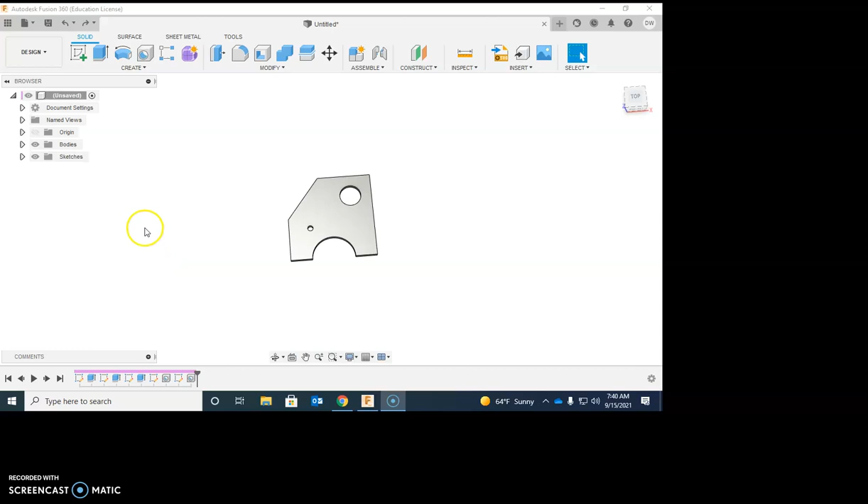Okay, so now that your block is created, we're going to do our CAM of this block, which is computer aided manufacturing. So you're going to go up here to design, where it says design up here in the top corner, and you're going to go down to manufacture. All right, brings you up a whole new toolbar here at the top.

We're going to be looking on this part, obviously, at the 2D manufacturing. So we're going to click on this, and there's all of these different options on 2D. We are going to do basically 3 that we use often. For a small hole that we have on the sheet, we're going to use a bore. We see here when we hover over the bore, you can see down below there, it shows some of those small holes there on that front face of that object. So this is what a bore is for.

Next one that we're going to use is for larger holes. We're going to use a pocket. What a pocket does is a pocket will clear out, as you see by the paths there, all the material entirely for that. So there's no pieces left there in the center of the object when you cut the hole. And you'll see the difference between that when I mention here about a contour.

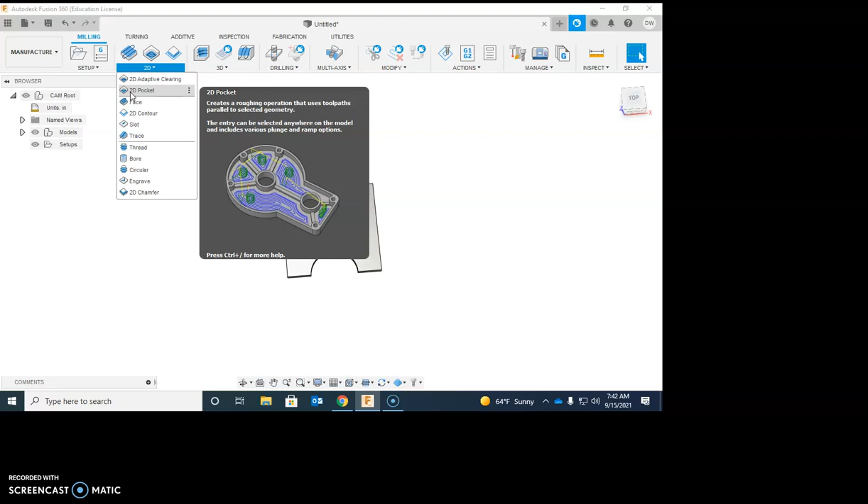So our last thing we're going to do is going to be for your outside path around the object, or for large holes, we're going to use a contour. So what a contour does, it just does one path all the way around the outside of the object, or as you see here, on the small holes all the way around the outside of the small hole. The problem is, when you do that larger hole and do that one path around the outside, it leaves you with that little disc in the center.

On plastic, that little disc in the center sometimes isn't bad, but it can still get jammed in there and it can snap off your cutter. Your cutters are very sharp, they're very hard, but with that they're also very brittle. So if that little piece gets jammed in there, it'll snap off your router bit, and for a 1/8 inch router bit, there goes about $30 to $40. So instead of that, we do the pocket, which removes all that material.

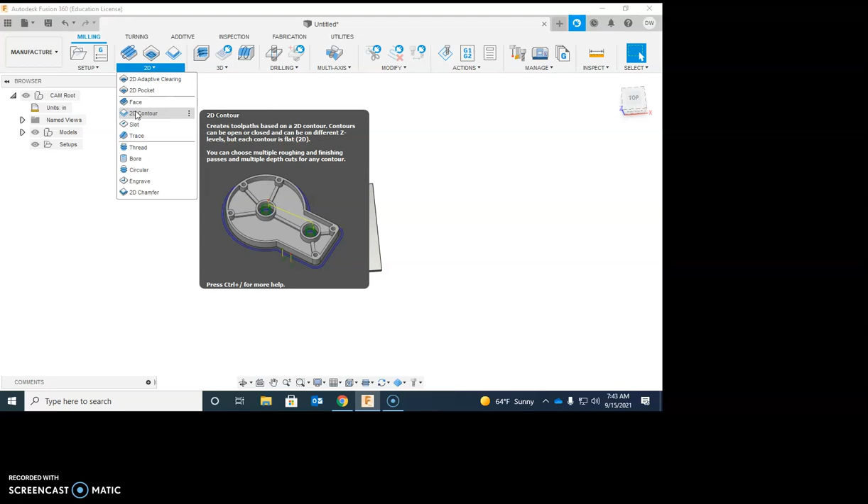If you're doing larger things, say a 2x2 inch hole in the middle of something, then we can do a contour, but we would want to fasten down that piece in the middle so it doesn't come loose. You could possibly put a screw in the center of that piece and screw it down to the table so it doesn't come loose. But you can't just let it lay in there loose. You could also possibly add some tabs to it. We'll talk about tabs later. All right, so there's the 3 different ones we're going to use.

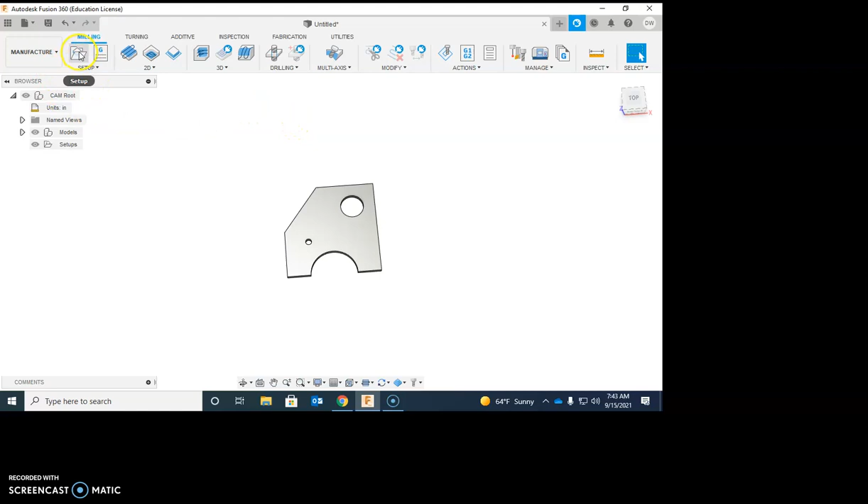We're going to start with our first one, our small hole. And again, on the small hole, that is a bore. So we're going to go over here to bore. Oh, wait, we're not going to do that first. The first thing we're going to do is up here in the top left corner, we're going to do setup. So we're going to click on setup. This is kind of the most important step, and I almost left it out.

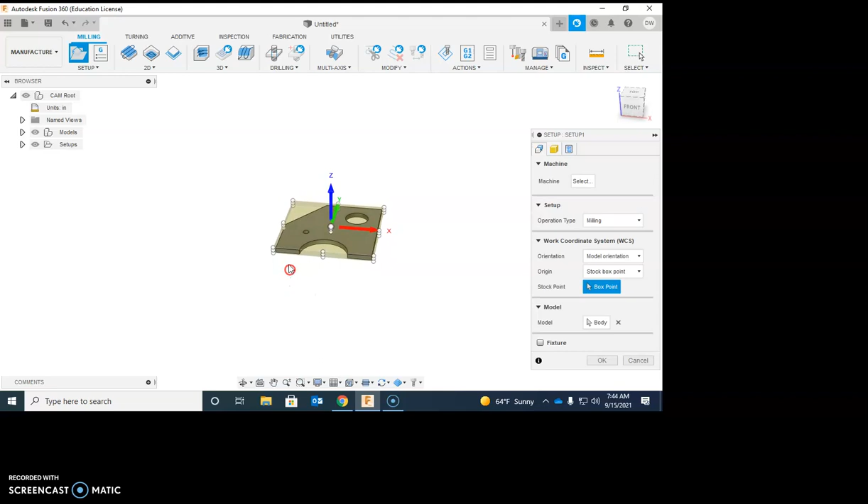When you go to setup, it gives you the little X, Y, and Z coordinate system out here in the middle of your object. What we want is the bottom left corner of the object to be the starting position, our 0, 0, 0 position, and the bottom left corner on the top surface of the object. So what we're going to do here is we're going to grab this. Oh no, we're not going to drag and drop. We're just going to click right there.

And move that right there to that corner where my X is pointing along in this direction, my Y is pointing up, and my Z is pointing out of that top surface. Now, it depends on the orientation you created yours in. It's okay if it ends up being in this corner.

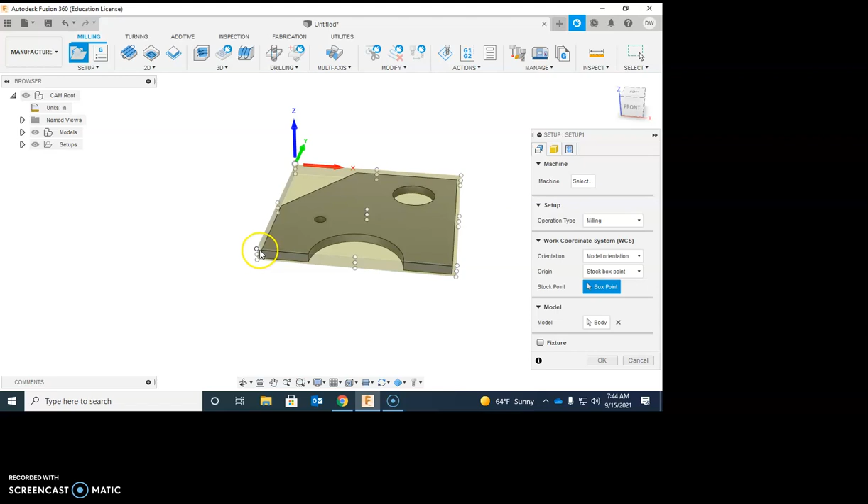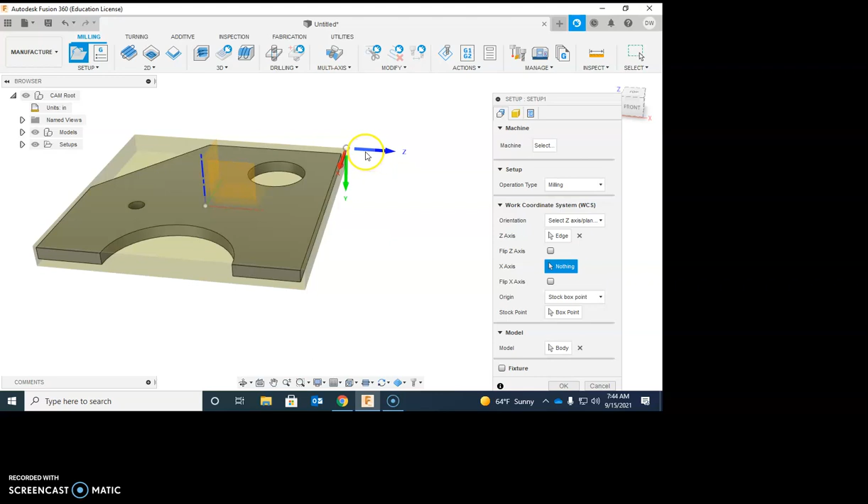You just have to have your X, Y, and your Z turned around. Now, you can adjust this if your X, Y, and Z does not match up on any of those corners. And the way to do that is like so. We're going to click on the shaft of the little X, Y, and Z. And if I wanted to change it to here, that would change the X, Y, and Z so the Z is pointing on that axis. That's not what I wanted, so I'm going to go back to here, click on the shaft again, and click on this corner of the object, and that switched my Z, so my Z is pointing up.

So there are some ways to modify this and move it around, and there are some ways over here to flip on the Z axis, flip on the X axis if it happens to be just opposite of what you need. This gets to be kind of a mess to get to where you want it to line up. But you can fiddle with that, experiment with that, and move it around. Right now, we're perfect here. Top surface, bottom left corner, X is side to side, Y is up and down, and Z is coming out. So that's perfect for our setup. We're going to go ahead and click OK.

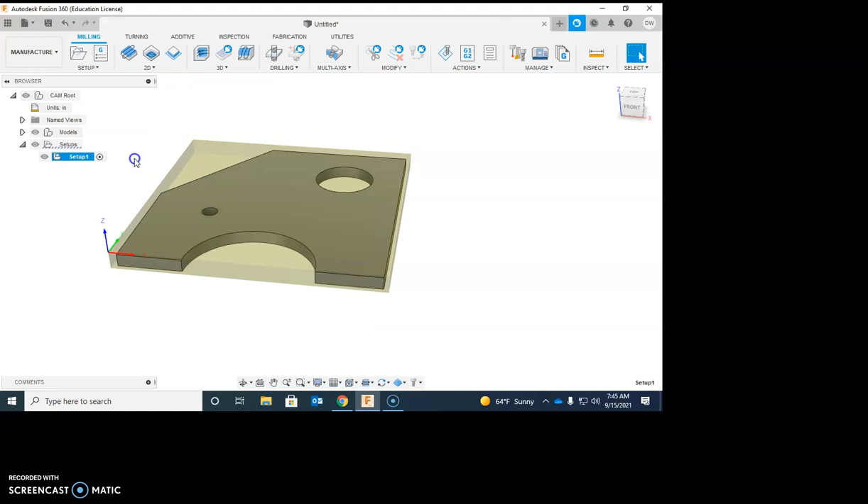All right, now we're going to go ahead and start with all of our steps here. So first, I'm going to go ahead and do my bore. To do this bore, we're going to rotate our object a little bit so I can see this bottom surface right here, and click on the bottom surface. And all I'm going to do there is a few settings. My first setting here is I need to pick my tool. It went to geometry first. I don't like that. I like to go to the tool first and set up my tool here. Right now there is no tool selected, so I'm going to click on select.

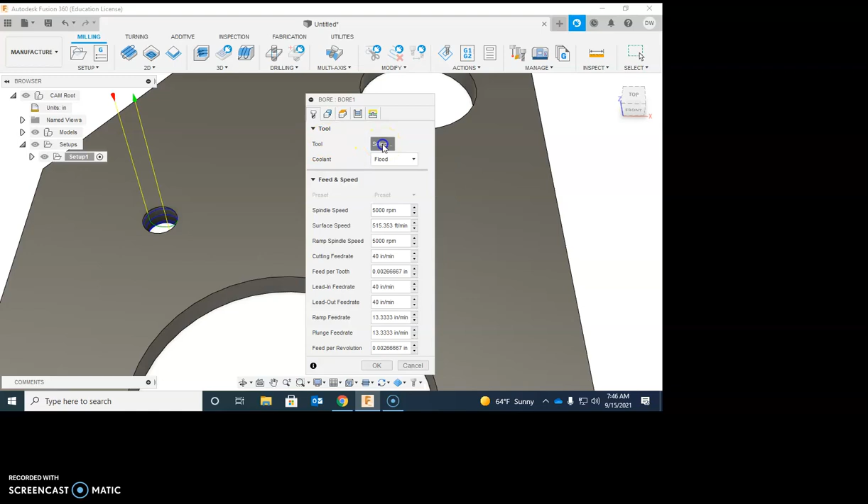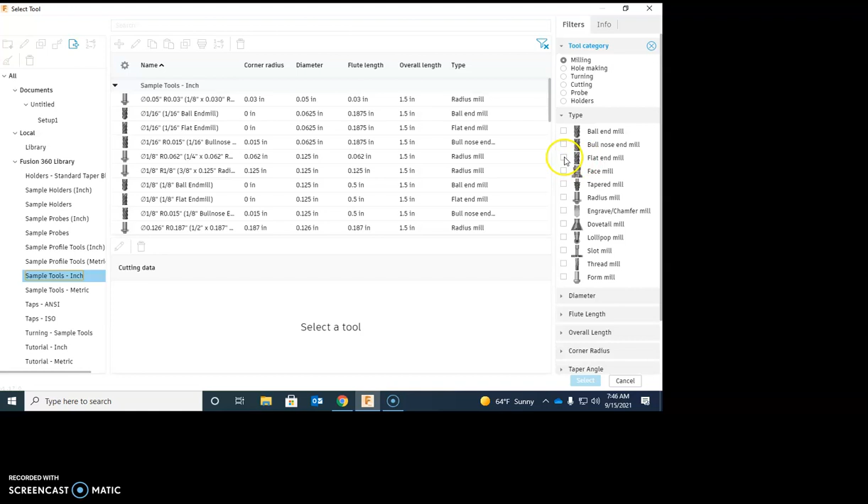Brings you up to this window. They have all kinds of sample tools built into this. So we're going to come over here to the side, sample tools inch. Under sample tools inch, we can narrow this down. We know what the diameter of our tool is, and actually we know another thing. The tool that we're going to use for this is going to be a flat end mill, so I'm going to select flat end mill. Then on diameter, I'm going to set 1/8. And that narrows me down to where I only have one choice, which is great. 1/8 inch flat end mill. Click and select that. Okay.

Now with this, there are some default speeds and feeds. We don't use many of the default feeds and speeds, but we can go ahead and go down through this list. If you didn't have any idea of the feeds and speeds to use, this is a good place to start, and it will cut using these feeds and speeds. We just kind of modified ours to what we know works really well with our router table. So down through this, we're going to do plastics roughing. So we're going to select on it, and we're going to go select.

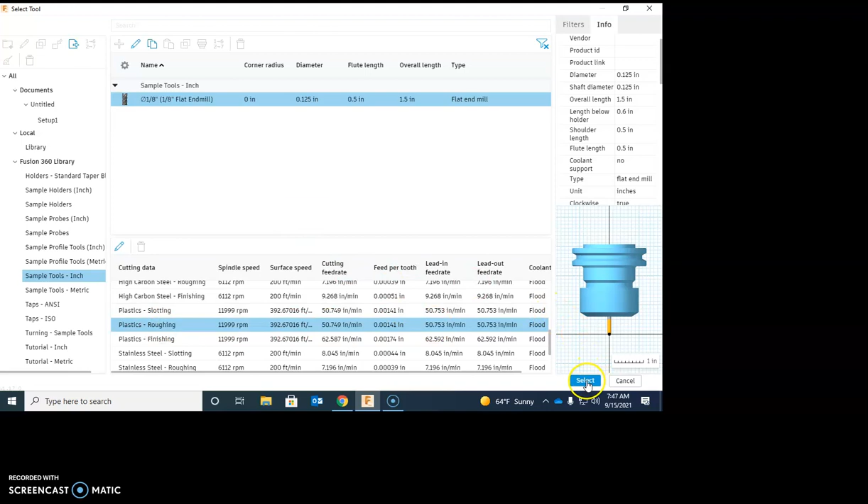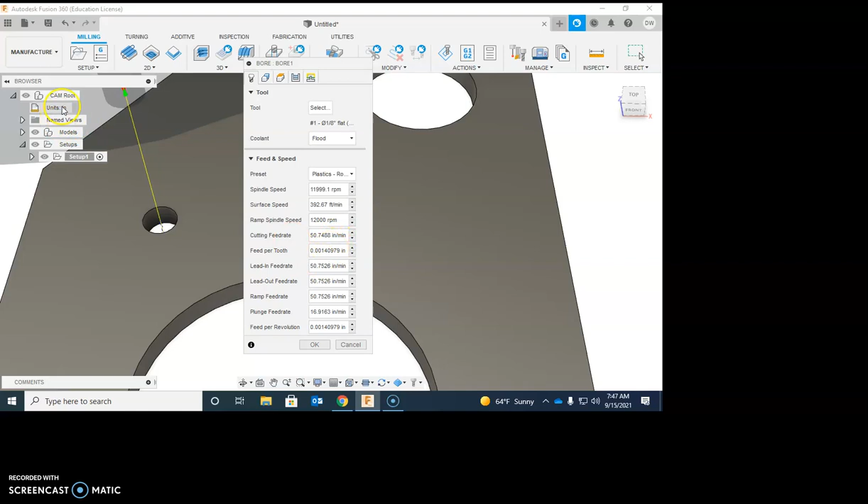All right. So again, that gave me all kinds of things in here. Our speed is 11,999.1 revolutions per minute. Feed per tooth is 0.00141 inches. All these different things. Now yours may be different. If yours is not in inches and it's in millimeters, millimeters per minute and things like that, you need to go out and change your drawing. Here underneath the units, you need to make sure this is set to the correct units. It's set to inches. Our router table, if you have it set to millimeters, will error out. It will not work. So make sure on units you have inches. Mine already was inches, so I'm going to cancel out of there.

Now we need to get back into that setup. Oh, I canceled out in the middle of that. All right, I'm going to pause the video and get back to where I just was. Okay, I'm back here to where I was. All right, so the 12,000 RPM on the spindle speed and the ramp speed, both of those are just great.

Cutting feed rate, however, we're going to move that up a little bit. Cutting feed rate, our machine does just fine at 80 inches a minute, so we're going to change that up to 80. Lead rate, we're going to change that to 80 also. 80 there also. We're going to change all these: feed rate, lead in feed rate, lead out feed rate. Ramp, we're going to change that to 80.

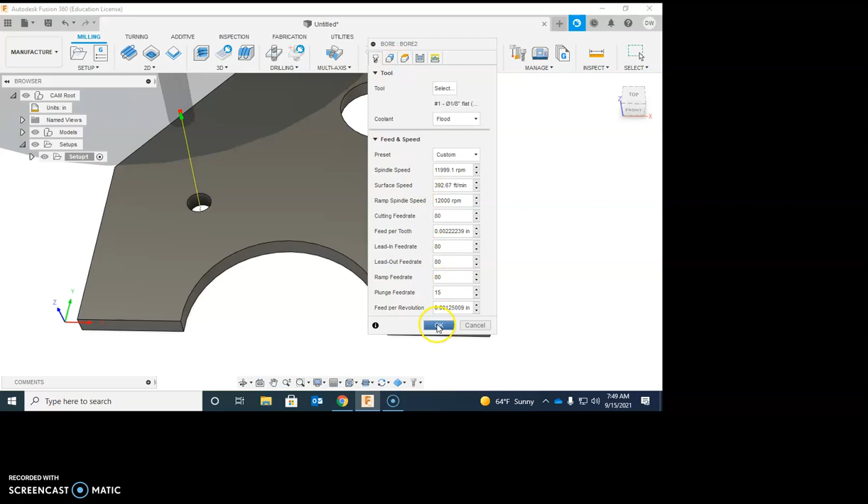Now here's one on the plunge, how fast it goes down on your plunge. We are going to actually cut that one down. It's at 16.9; we're going to take that down to 15. Seems like sometimes that thing plunges really fast. All right, so for this one, for the bore, that's all we need to change. There are some other tabs up here that we'll look at later on some of these other processes that we're going to do, but not here. So we're just going to go OK. All right, so that's got my first one done. It'll show up here and kind of show you that first little hole.

All right, we're going to go back up here to our 2D. This time we're going to do the 2D pocket. Again, very similar to what we did last time on this pocket. We're going to pick the bottom surface of this hole. And there we go. Now, what's kind of nice is, since I set all of my feeds and speeds on that first tool, now it assumes I have the same tool here, and all those things are already changed. It has the 12,000 RPM still, and the 80 inches a minute, the 15 inches of feed rate of the plunge. All those things are already set, and that's great.

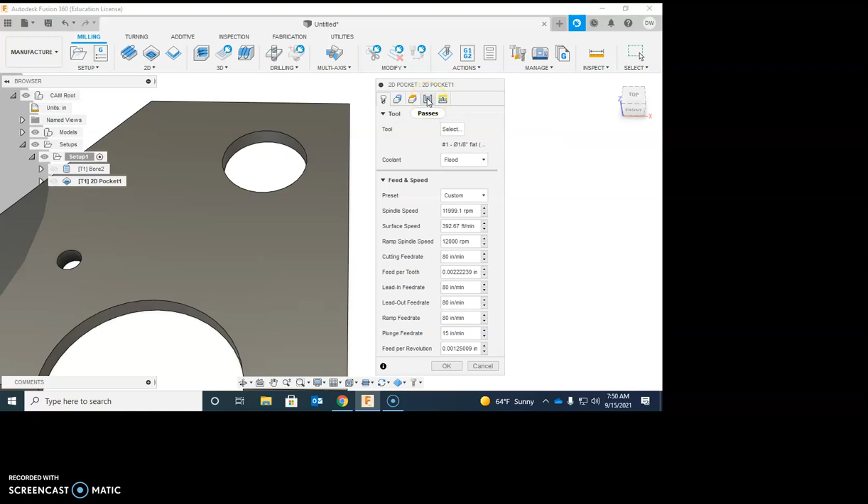All right, now on this one, we are going to do some other things. We're going to go over here to our passes tab, and on our passes tab, we're going to come down to the stock to leave, and we're going to check on that.

Okay, as I started to say there, sorry, I had to pause my video. Somebody came into the room.

On the passes tab, you're going to go over to stock to leave. This is a roughing cut, but we typically use it as our final cut. It has stock to leave, which is 0.02 inches, and that's in the radius. So if you leave 0.02 in there, that means your hole is going to be 0.04 smaller than what you called it out. So what we've got to do is just uncheck that stock to leave. We don't want to leave any stock there at all, so it makes our hole the full size.

All right, now this next thing I'm going to show you depends on the thickness of your stock. If you're cutting 1/8 inch thick plastic or less, you can do one pass. So 0.125 or less, you can cut it in one pass. If your stock is 0.125 or over, you have to do multiple passes. And that's going to be here under multiple depths.

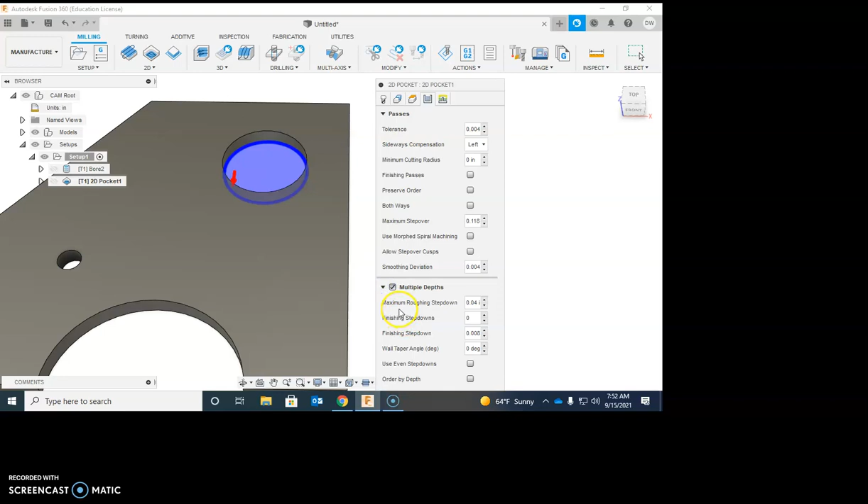So if I check on our multiple depths here, right now, remember, I set my material to 0.1 thick, but that was just a preliminary thickness. We'll set the actual thickness of our material as one of our very last steps. So our maximum roughing step down, we change this to 0.12. That way you're going to do multiple depths. Each cut is going to be 0.12 deep, and that's going to work awesome. Once you have all these things set, we're going to go down here and go OK. We can go ahead and shorten that up a little bit if we want to. Go here and do OK.

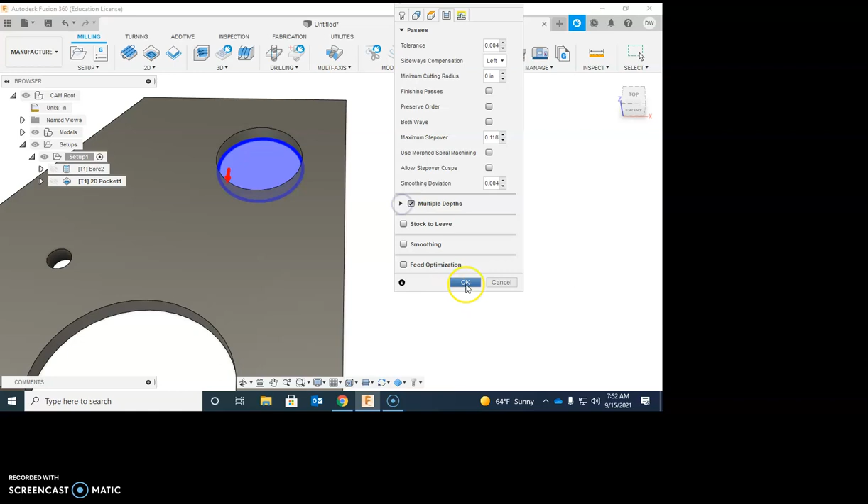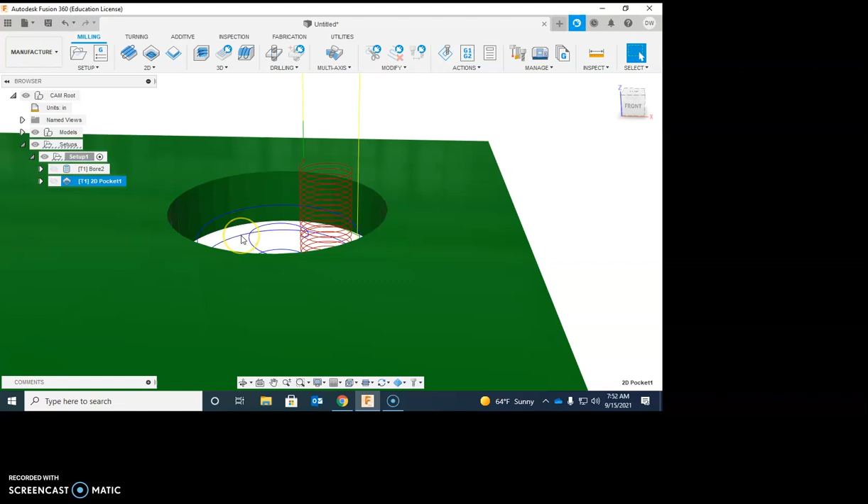And again, you'll see this will generate it. Notice it comes down and it just spirals down and it does one cut on this, and that's it. Actually, it still does look like it does two cuts. It'll do the first cut on this depth, and the second cut it'll do down here on this depth. All right, so we're good there. Now let's go ahead and do our last piece. You always do your inside parts first, and then you do the outside of it.

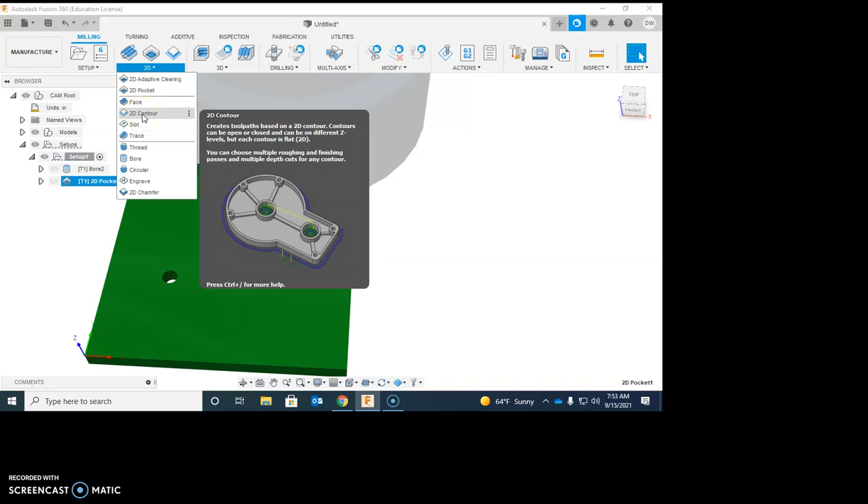You want the piece to be held solid in place and do all these interior things before you cut this exterior path. So we're going to go here on 2D. We're going to do a 2D contour. Once again, just as we've done on everything else, you're going to select the bottom surface. And we're going to start going through here. Again, our cutter still has all of our correct settings, so that's great.

Next, let's do it in the same order as we did before. We're going to come over here and do passes. Same thing on passes. We're going to go multiple depths if it's over a 0.12 thickness, and we're going to set this to 0.12 for our depth. It does have the roughing passes. This does not have the stock to leave on it. So that's good there. We're going to come back now to our geometry tab.

On our geometry tab is where we actually add tabs to your piece. Tabs are the little things you see here in the picture that hold it into place so it doesn't wiggle loose while you're cutting around the outside of it. When possible, it's best to design a part that does not have tabs on it. A lot of you guys are going to be doing battle bot parts and different things like that. You always have a lot of screw holes out in the center or bolt holes where things are held down.

You do that in one pass, put all the bolt holes or all the holes cut into it, and then you just use some screws and screw that part to the table, and then you can do a pass around the outside. This one would not work well with only one hole in it to do that, so that's why we're going to have to do tabs on this. And it's a small part, you wouldn't be able to get screws in there anyway. So we're going to go there to do tabs.

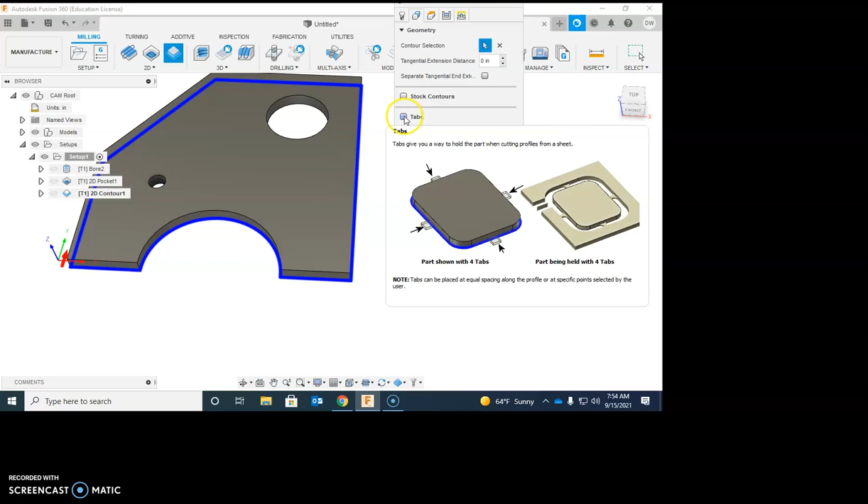The tabs, however, are too small for plastic. It just will not work well. We typically even leave these larger for our metal also. So our tab width, we're going to change to 1/4 inch at 0.25. Tab height, we're going to change to 0.06. All right, so 0.25 and 0.06 for those two. And that is it. There's nothing else we need to change on this. So on this one, we kept our tool set correctly. We made our tabs. We changed our passes to multiple depths. And that's it. You're going to go OK.

Oh, wait. No, we're not going to go OK. We didn't place our tabs yet. The tabs here are right now at by distance. They're spaced out every 1 inch. I don't love that because it puts tabs in places we don't really like. We don't want a tab down at the bottom of this curved arc because it's going to be really hard to sand out. We don't have a sander that sands in the bottom of a curved arc very well.

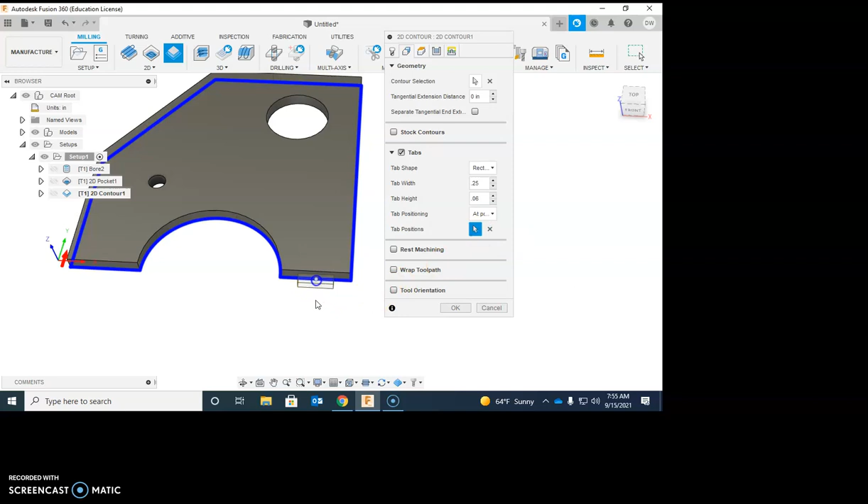So better than at by distance, we're going to go at points. At points, you're just going to click on where you want your tabs to be. So I want a tab to be there. I want one to be there. So 2 on that side. Spin this around. 1 approximately in the middle of this side somewhere there. 1 there. And 1 there. So now I have all those tabs. We're going to go OK. It's going to calculate that. And that looks pretty good. There you can see all my tabs.

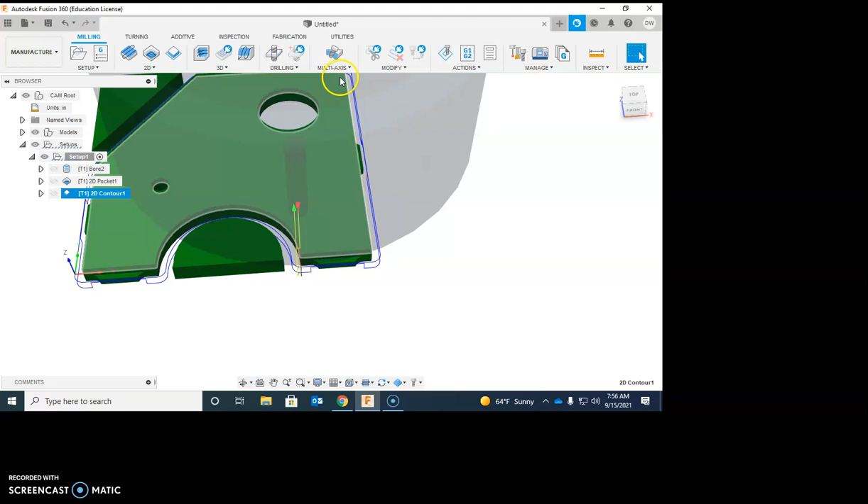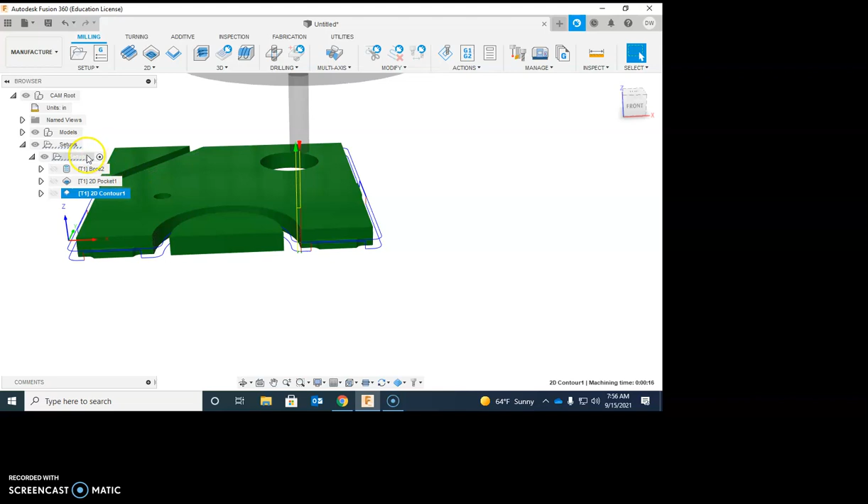Here we can actually do a preview of what this looks like. We can simulate it. And we can play through our simulation. You can see what this thing does. Oh, and now here, this is an important step. Notice it's just doing that outside pass, or the outside contour. I'm going to go ahead and stop this. That's because I selected just on the contour here. I want to make sure I select on the setup, and then do my simulation. And now I'll do all of my steps.

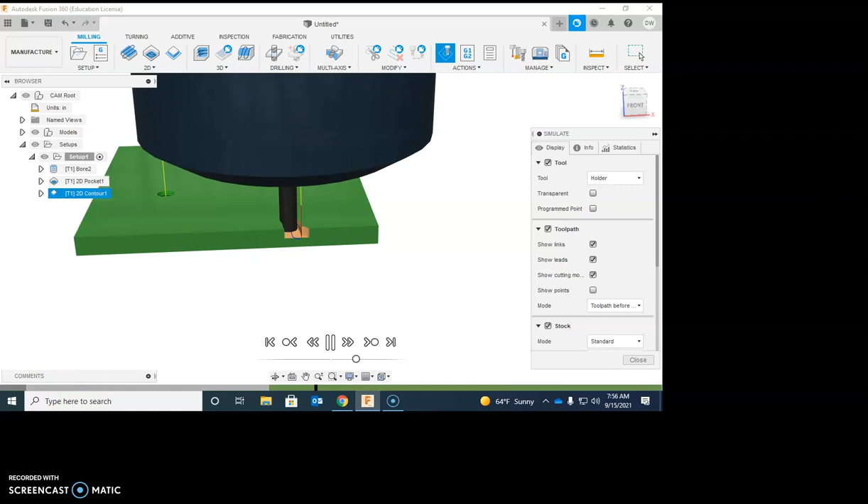This is the same thing when you export this to post process and create your post. If you're not selected up here on the setup, it won't do all your steps. It'll just do the one thing you're selected on. So there it goes around, and the time's going to run out before it finishes this, but you can see what it looks like. Good job.